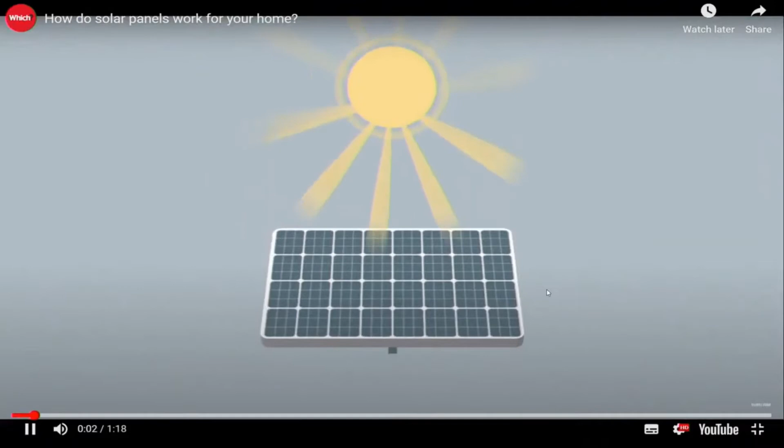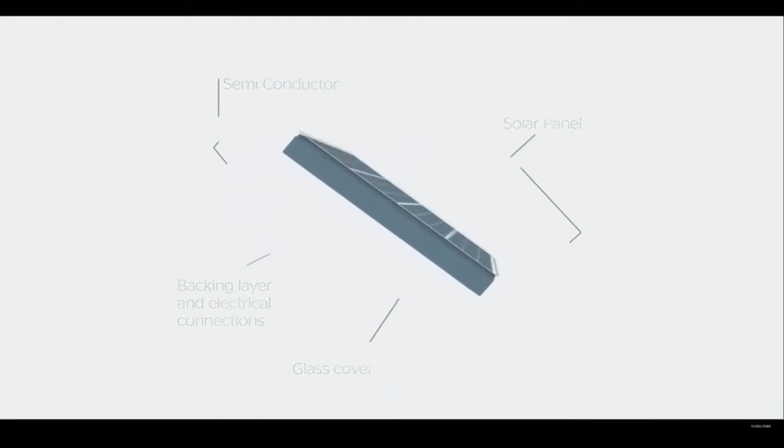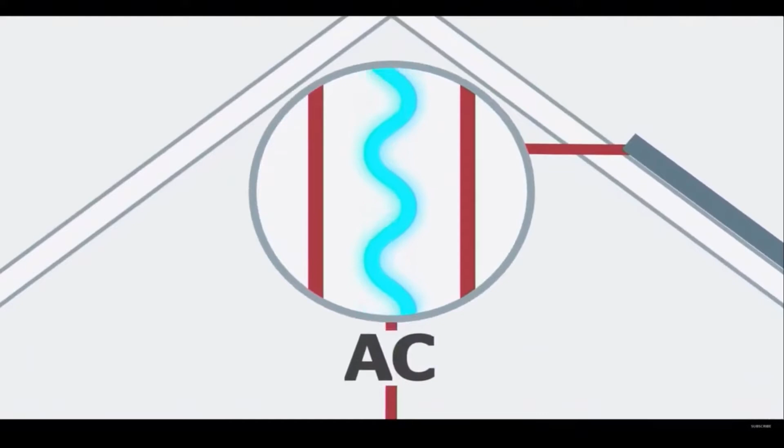Solar panels, sometimes known as solar PV, use sunlight to generate electricity. The key part of a solar panel is a thin layer of semiconducting material that absorbs sunlight and converts it to electricity. This can then be used to power electrical appliances in your home. But before it can do this, the electricity your solar panels produce needs to be converted from direct current to alternating current. This makes it safer for use in your home and usable with your appliances.

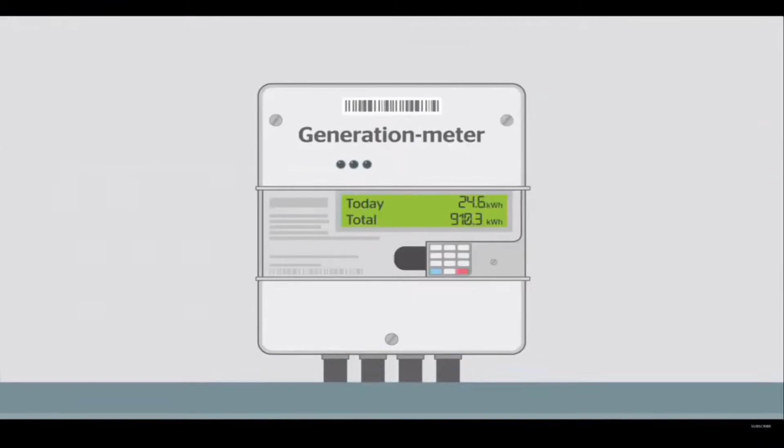You'll need an inverter to do this, which is a box that's usually set up in your loft. You'll also have a meter inside your home to show you how much electricity your solar panels are generating in real time. The sunnier it is, the more power they'll generate, so duller days mean they'll produce less electricity. And they won't work at night or if heavy snow covers them.

Therefore, if you have solar panels, you'll still need to buy some of your power from the national grid. You can also install a solar battery to store excess electricity from your solar panels, but this usually won't be enough to make you completely self-sufficient. Any electricity you don't use or store is then exported to the grid.

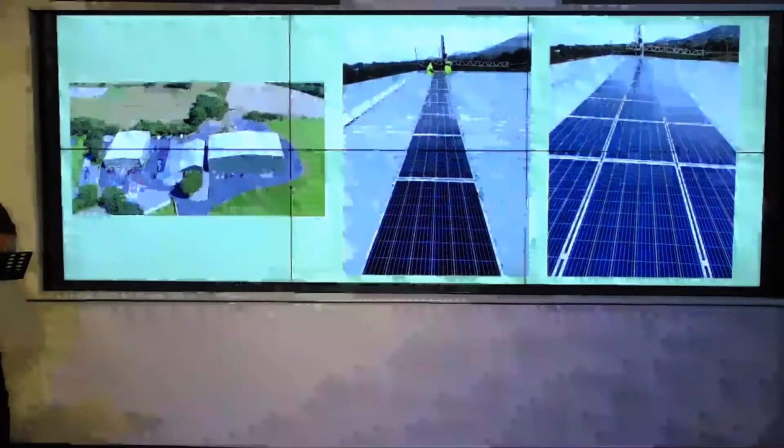So to start the Mountain View journey and our involvement in that, which is why we're here tonight, it all started with an email from a Mr. David Doricott back in January 2006, who inquired about having solar installed at his property in Mountain View. I didn't know David at all and didn't even know the Mountain View site, so we did our own research and just Googled the address. To my delight, when these Google images appeared and we saw these vast south-facing, beautifully unshaded roofs, I immediately responded to David's email and took advantage of his earliest opportunity for an appointment.

We met around mid-February and discussed various items of the infrastructure of the property, the size of solar PV array that would be suitable, and different aspects of how it was going to go together. We went off and put a report together, full design and costings, and submitted that to David in March 2006.

16. I don't know, I'm looking at 16. That's a long time, yeah. 2016, my apologies.

So after months of different discussions and various delays, 2016 actually escaped us. In early 2017, David gave the green light to push on and get the necessary work done to make this happen. Stage 1 was the planning application. Stage 2 was getting building control and structural engineers' reports. And the final hurdle in it all was getting the MUA on board with tariffs.

But we got through all that, and in May 2018 we started the first installation. You can see from the clouds in the sky that the weather wasn't 100% favourable, but we weren't going to lose any more time, and we started the installation.

You can please go to the next slide. The installation moved inside where we installed the SolarEdge inverters. There's a number of SolarEdge inverters in the film studios next door, and obviously the connection to the infrastructure of the building, which is the main distribution board.

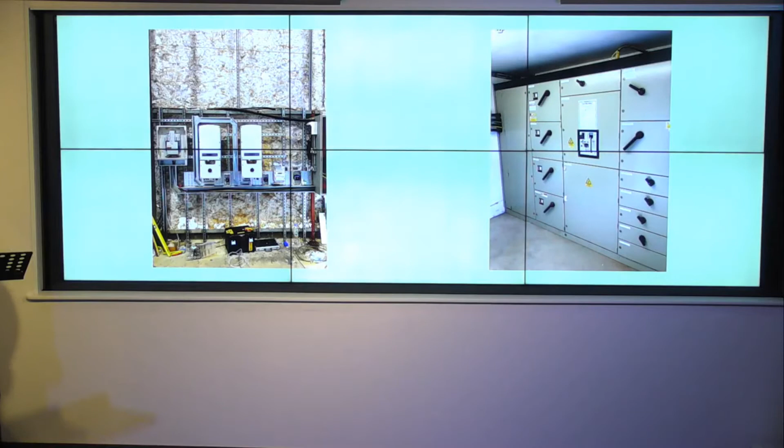The solar panels we used here in stage 1 were the 275 watt panels. They were favourable both cost-wise and efficiency-wise at the time, and we used those along with the SolarEdge inverters. In June 2018, next slide please, we finally had the site up and running for stage 1.

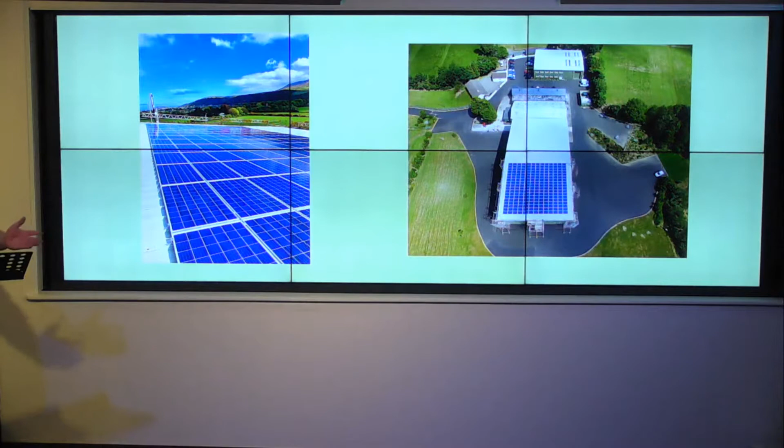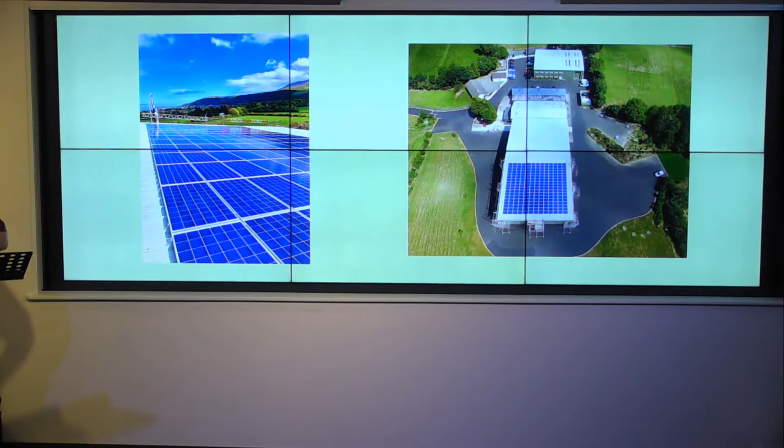Very soon after, 12 months later, when the first year's worth of energy was reviewed and we checked the generation figures against the costings, it was very apparent to David and everyone here that the rest of the south-facing roofs should be utilised.

So in the back end of 2019, the process started again: planning application, building control, structural surveys and whatnot. Then in July this year we started to install the second stage. Next slide please - the second stage, as you can see, covers all the roofs.

There's a little video here that will give a better overall view of the panels on the roofs, because the roofs here are actually not visible for most. These two elevations are slightly visible as you come in and go around the building, but the two main roofs are the film studio and the main office building. So if you could just play the video, please.

You enjoyed watching that. That has just given us an overview of the expanse of the panels across all the south-facing roofs. The next question we're always asked is, what is the maintenance involved with the solar PV system?

The reality is the panels on the roof have no moving parts whatsoever, so there's no maintenance to do with the panels. The only slight issue is from time to time, with bird muck, which can be an issue if we get weeks of dry weather, which fortunately we don't often get here. We get an awful lot of rain that seems to keep our panels very clean. Jonathan has a process in place where they've got a genie lift and cleaning equipment, so in the event they need a clean, it can be done.

The beauty of the SolarEdge monitoring platform system is that not only will the panels tell you if there's a fault, whether it's shading or an actual mechanical fault, the system will notify the site owner. It tells them the panel has gone down, and this system is sophisticated enough to tell you exactly whereabouts in the roof that panel is. Each panel is individually monitored, giving you optimum performance throughout the lifespan of the unit. So the monitoring software is key really. Some traditional inverters just look at the array as one panel, and if there's a fault you'd never know without a monitoring system. Whereas this system gives you excellent detail and maximises the return on investment, ensuring the system is working correctly to the end of its lifespan.

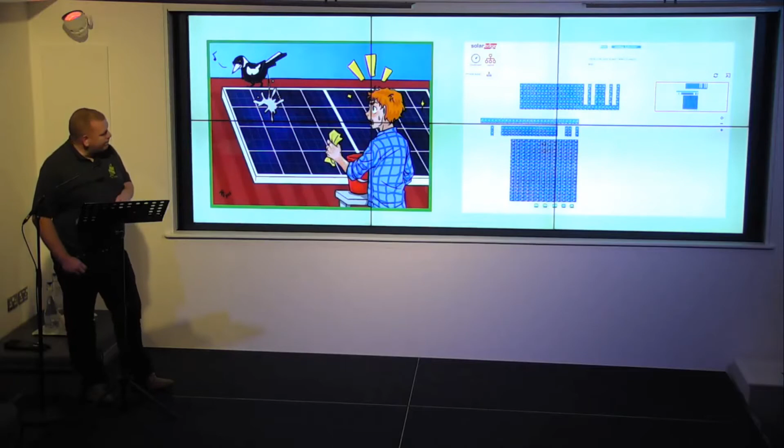A lot of the time people ask us why they should install solar energy. We're very fortunate that we don't go around the island selling solar. Any installations we do are for people who've come to us when we deal with inquiries. We don't need to sell solar, we deal with the inquiries that come in. We've never knocked on anybody's door to ask if they want to buy solar, nor will we ever start that.

So the various reasons we hear from customers about why they want to install solar energy: some people simply want to reduce their monthly bills, which this will exactly do - it will reduce your Manx utility bill. Some people want to reduce their CO2 footprint, which this will absolutely do. And some people tell us they're doing it just because it makes them feel better in themselves, they know it's the right thing to do. So regardless of whether you're doing it to save money, reduce your carbon footprint, or make you feel better in the world, all those boxes are ticked regardless of which option you're going for. It really comes down to personal choice, and it makes total sense to us.

We started this business here in 2008 on the island. Of course it was very slow, the island was very slow to adopt solar technology back then. We had a lot of doors even closed on us, even from a government point of view - they weren't interested really. Over the years that interest grew. We went from installing 1 or 2 jobs a year in 2008 to doing 1 or 2 jobs a week now in 2020. So the need and want for solar on the Isle of Man is at its highest now that we've ever seen it in the past 12 years, which is obviously fantastic for us. So that concludes everything I've got to say here this evening.

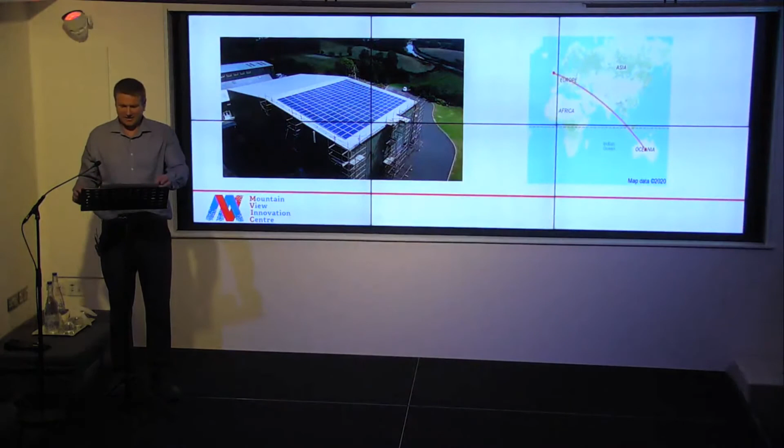So after some time, Manx Utilities came back and said the threshold would be 50 kilowatts. This would mean we could import 50 kilowatts and we could export 50 kilowatts. If we were to export, they would also pay us half the price of what we pay them per unit.

It had now been a full 2 years since our first meeting with Martin, and we had everything in order to place the order. Since our first meeting, the panel efficiency had improved so much so that we could squeeze an extra 4.5 kilowatts into the same area for the same cost.

So we went ahead and ordered our first 234 panels, which, believe it or not, we can count them later, but this is what 234 solar panels looks like. Each one of these panels is capable of producing 275 watts, and it gives a combined total of 64 kilowatts.

To keep us within our tariffs, these are then fed into the two 25 kilowatt inverters, and after careful consideration, we went ahead with the order. The array was fairly straightforward to install from my point of view, and on a beautiful sunny day in May 2018, we were ready to turn on the installation.

Within the first week, we had already generated 2.5 megawatt hours. Now, I'm going to put that in normal terms, but I'm going to involve you here, guys. It's enough to run one of our electric vehicles outside. Could somebody just guess how many miles do you reckon you could get from that 2.5 megawatt hours we produced in the first week? Someone take a guess, random guess.

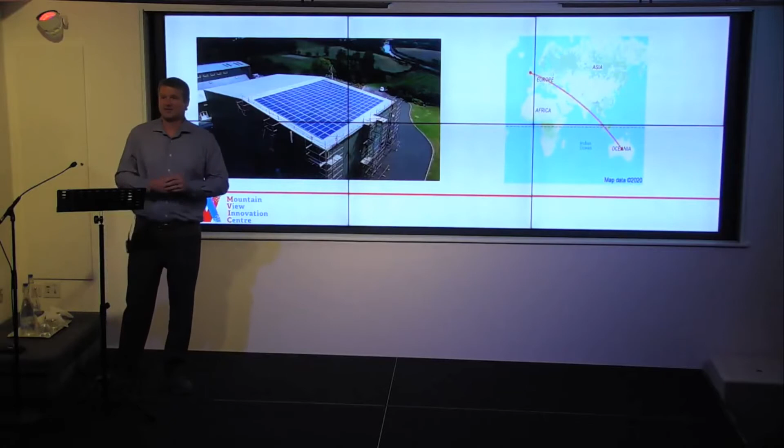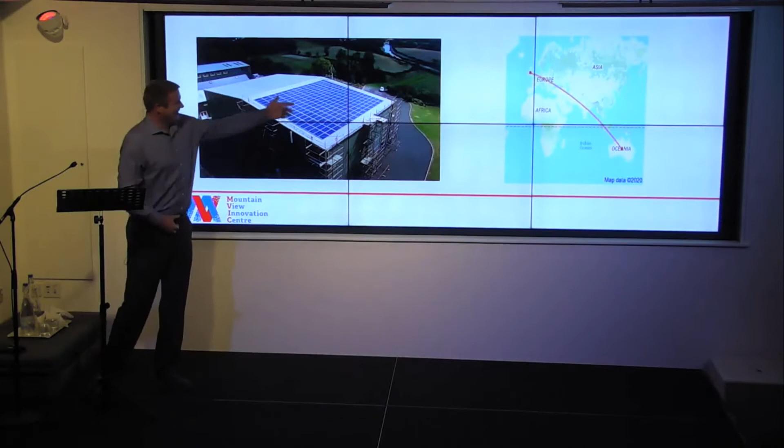Sorry? Oh, it's good, it's good, it's good. It's over 9,000 miles. That would take us from the Isle of Man to Australia in the first week.

We're going to stay on that theme of miles as we go along.

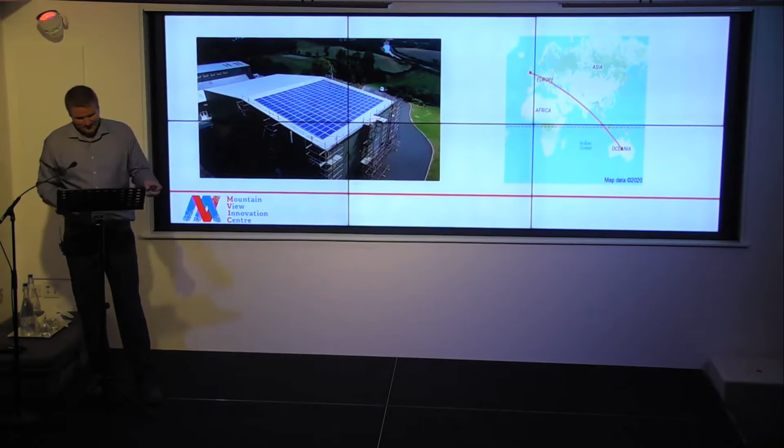Now the system is up and running, I regularly monitor the system. As Martin touched on, we have monitoring software. I use two different methods. The first here is the SolarEdge, and this is a screen grab from last Thursday, and it wasn't a particularly good day, I can't even remember it.

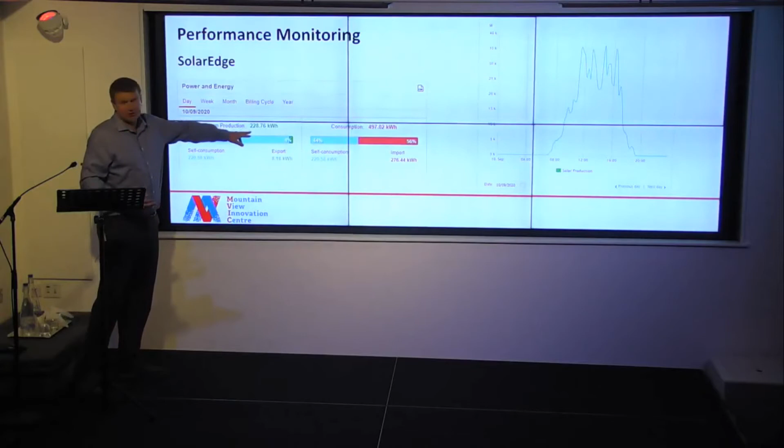And for our solar, as you can see on the system here, it tells us that the system produced 220 kilowatt hours, which offset our daily usage that day by 44%.

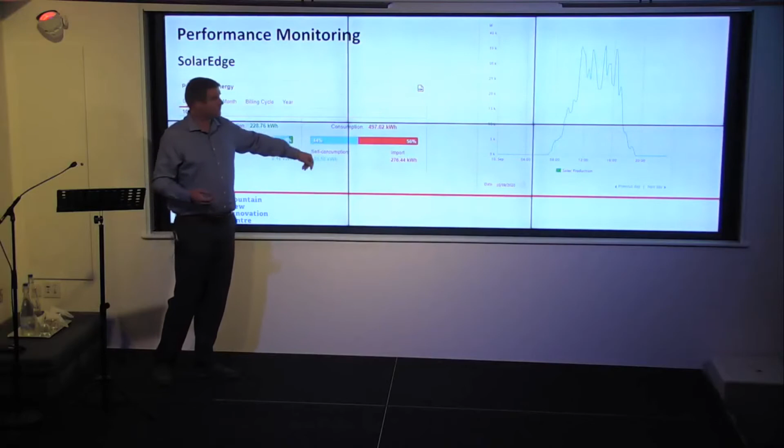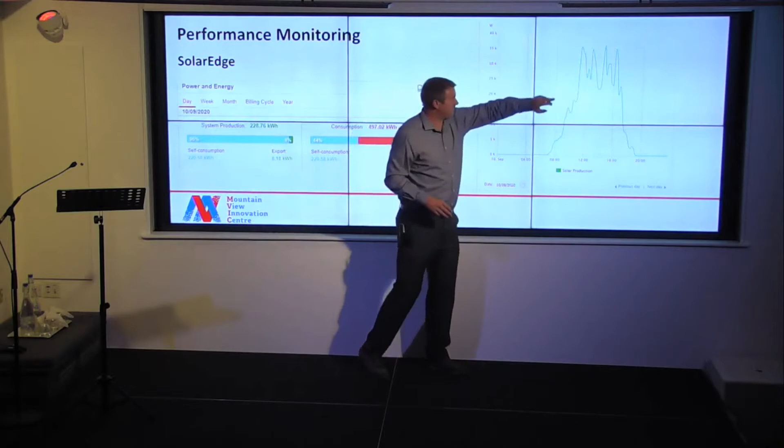It wasn't a particularly great day because on this side you can see that this only reached 35 kilowatt hours, and we have the capability of reaching 126, so 35, and yet still we managed to export 4% of our daily production that day.

The other piece of software I use is EnergyEye, supplied by Manx Utilities. The EnergyEye software monitors what we actually buy from them. This is monitoring software that's just attached to our meter.

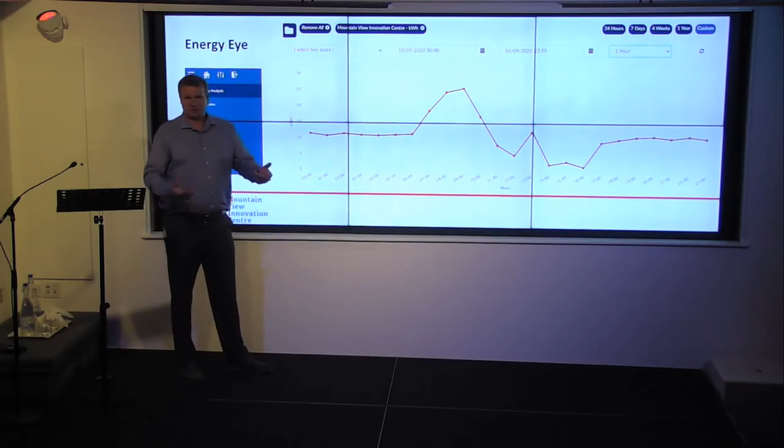On this graph here, this is our base load, from midnight to 6 in the morning, this line here. Our base load is what we use regardless, throughout the day, throughout the night, bank holidays, weekends, that's what we use. And it's about 12 kilowatt hours.

As you can see, on this day, to utilize our energy, we have lots of equipment which is wired up to timers. So at 7 o'clock in the morning, our site begins to wake up and equipment starts to get turned on. Then come 9 o'clock in the morning, we peak at 25 kilowatt hours.

It then goes down because this is when the solar is ramping up. Now this isn't a particularly good day - I've got better slides, but I thought I'd show you one that went up and down a little. So at 12 o'clock, it's gone all the way down, and it's less than 5 kilowatt hours to run this entire site. And then again, we see the base load as the sun goes down.

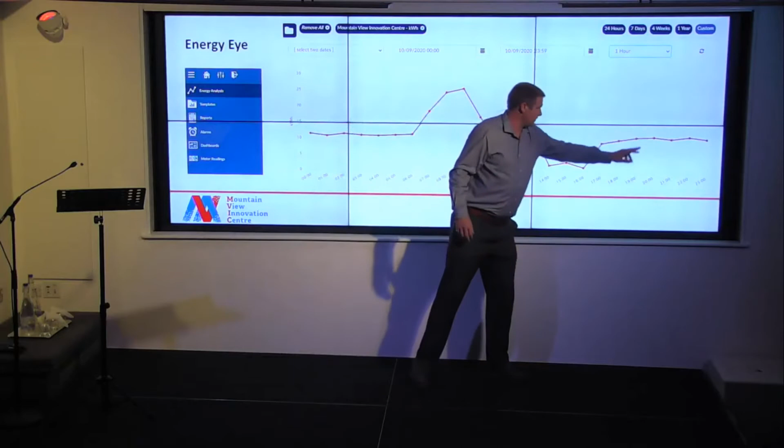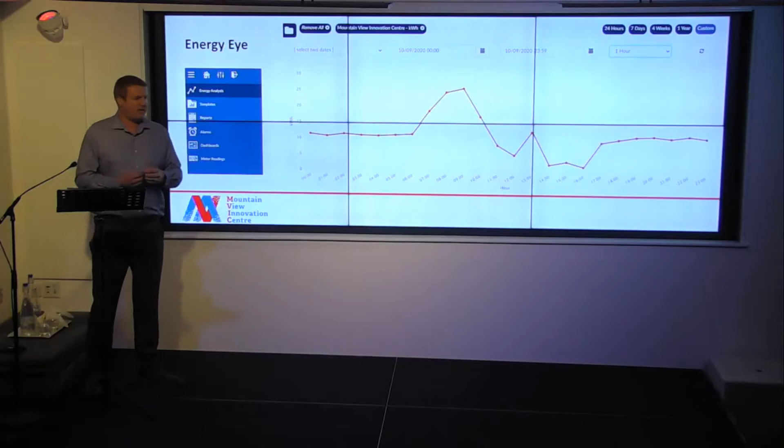We use this software to optimize how we use our energy. And through this, we realized that we had an excess and we were selling back to the grid. They'll give us half price, so we want to maximize the energy that what we produce, we want to consume it.

So we looked at what other things we could change over. For example, all the hot water on site is on timers, which is then heated by immersion heaters. Babbage's Bistro is soon to be converted to fully electric, and we have 6 electric vehicle charging points to power our 13 electric vehicles on site.

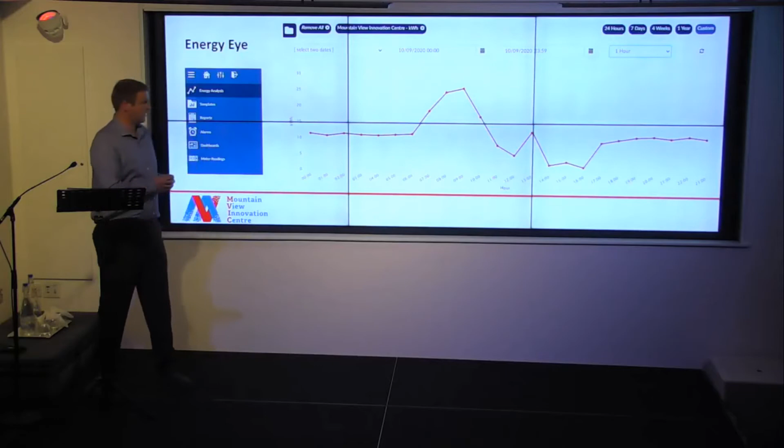There were additional benefits that came as a bit of a surprise, to be honest. In this slide, this is from the EnergyEye. You see our base load again. And here we can see this is the effect for about 5 months of the year.

We don't actually import anything, and then the base load again. So this goes from 7 o'clock in the morning till 6 o'clock at night when it just starts to come in. Manx Utilities have a tariff called the Economy Commercial Tariff, and if it's a split two-rate tariff, it has a peak and an off-peak system.

And the off-peak system, if you use 30% of your electric during the period, an 8-hour window from 11pm to 7am, they'll let you have that for half price, which is fantastic because, as you can see, through this period, we're not using anything, and most of our electric is used overnight. In this graph, we're actually using 65% of our electric overnight. By making this simple change, we saved an additional £2,500 per year.

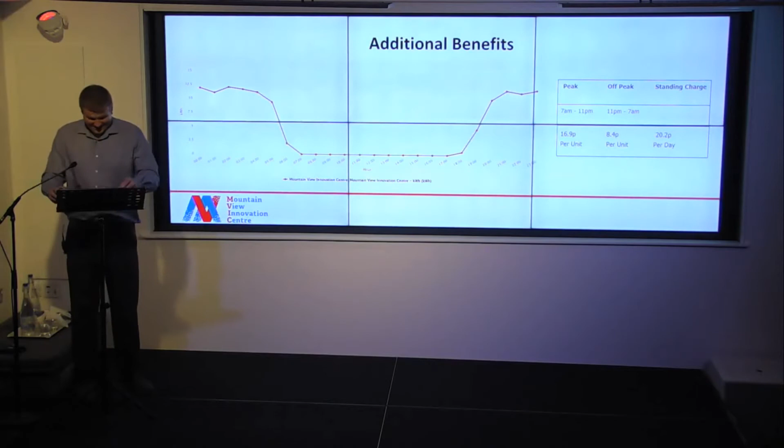To put that into layman's terms, this is still enough electricity each month to power 24 homes for that month. Or it could run one of our electric vehicles on site for how many miles? Take a guess, guys. 1 megawatt hour?

Wow, you're good, you're good. Do you have an electric vehicle? Oh, well, there we go. Okay, yes, and that's enough to take us from Ukraine and back.

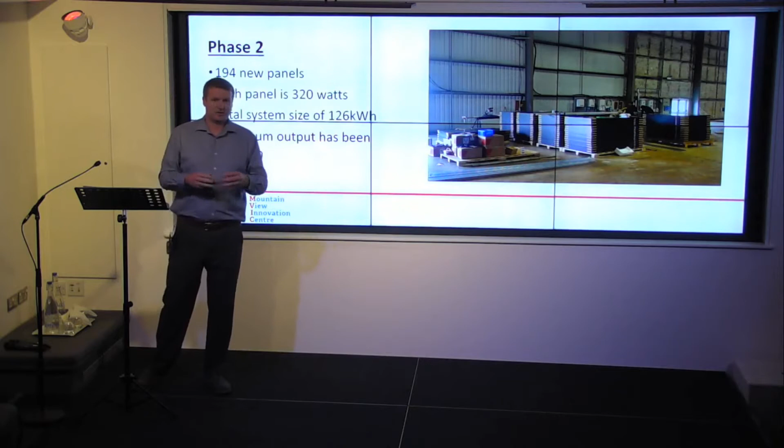Phase 2. We would often joke that we have another 3 south-facing roofs, and since the first phase was installed, the site has become a lot busier. We have our Badger's Bistro, which wasn't here 2 years ago, our Grasshoppers Nursery, and lots more tenants and small businesses joining us. We also started our electric vehicle scheme, which has 13 electric vehicles on site and 6 22 kilowatt charging points to power them.

So therefore our energy usage per day also increased. We're now averaging, and we can accurately say, about 500 kilowatt hours. So we had the same considerations as phase 1: location, planning, and tariffs.

This is what 194 solar panels looks like when they're on pallets. It doesn't look like anything spectacular, but when they're all laid out, they cover a vast area.

I know what you're thinking, what about these pesky tariffs? Well, we have the ability to cap our incoming supply at 50 kilowatts, and we have the ability to cap our export supply at 50 kilowatts, so we remain within the tariff. Then there's the Economy 8 commercial tariff, which gives us half price energy overnight. If we use more than 30% during that period, we'll actually be using even more than that during that period, because we won't be using as much during the day. So our tariff remains the same.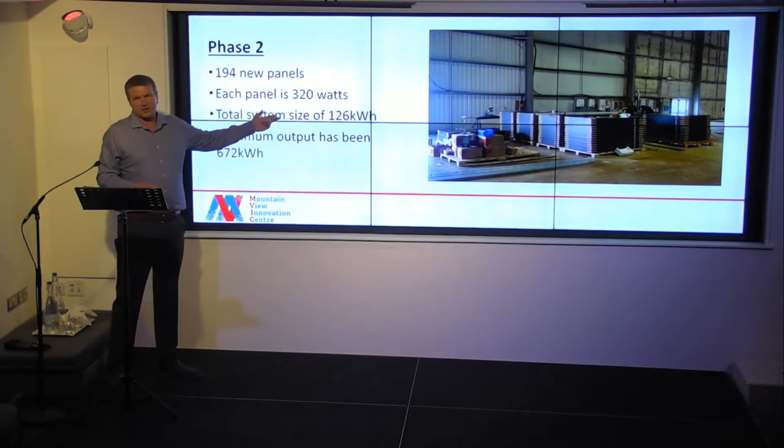Now, despite having less panels than the first round, we have still been able to double the site capacity. This time we have 194 panels, but these panels each are now 320 watts, giving us a total system size of 126 kilowatt hours. Our record-breaking day so far was in August.

This has only been installed just 2 months so far, and we produced 672 kilowatt hours. You're trying to do the maths, aren't you? Go on, spoil it for us. What's the number?

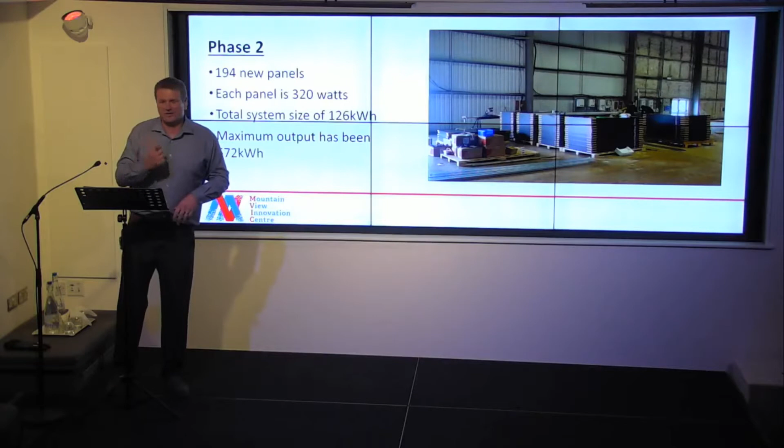3,600. And I don't know where that takes you, but it takes you a very long way in just one day. I expect with the completion of phase 2, the site will almost completely offset our electrical consumption for over 8 months of the year.

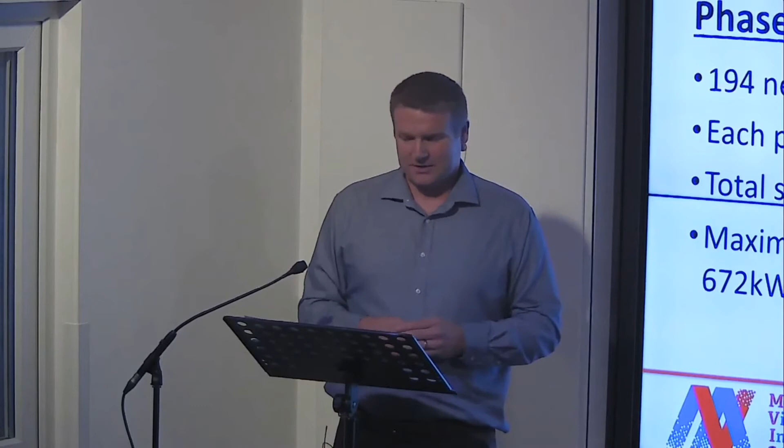Now, the environmental benefits of the system are that we've saved over 60 tonnes - this is actually out of date because we ticked over to 66 tonnes just this morning, which is the equivalent of planting just shy of 2,000 trees. We're the very proud winners of the 2018 UNESCO Biosphere Award for Environment.

And now I'm going to pass you over to David Doricott to talk about the financials. Thank you very much.

So I'm the typecast businessman who's got to make this a financial justification, because it's one thing and a very laudable thing to invest in green energy because it's the right thing to do, as Martin said, or because you just want to reduce your electricity bill. But can you make the numbers work? Certainly our experience, real experience, not theoretical experience, on our phase 1 scheme is that is very much the case. And what I'm going to go through with you is some real numbers from our phase 1, that's the 254 panels, and I'm going to pick the 2 complete years from June 2018 to May 2020.